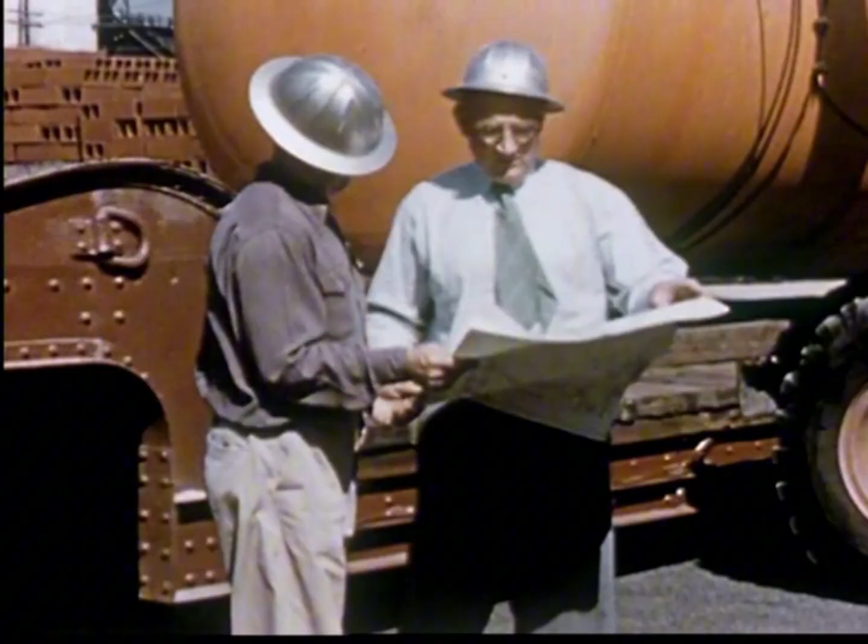In the 1950s, mechanical engineering was at the heart of industrial progress. From designing engines and machines to improving factories and transportation, engineers shaped the technology that defined a new era. It was a time of slide rules, drafting tables, and hands-on problem-solving, long before computers transformed the profession. This rare footage takes us back to the workshops and offices where ideas became machines, and machines powered a growing world. Welcome to Industrial Heritage.

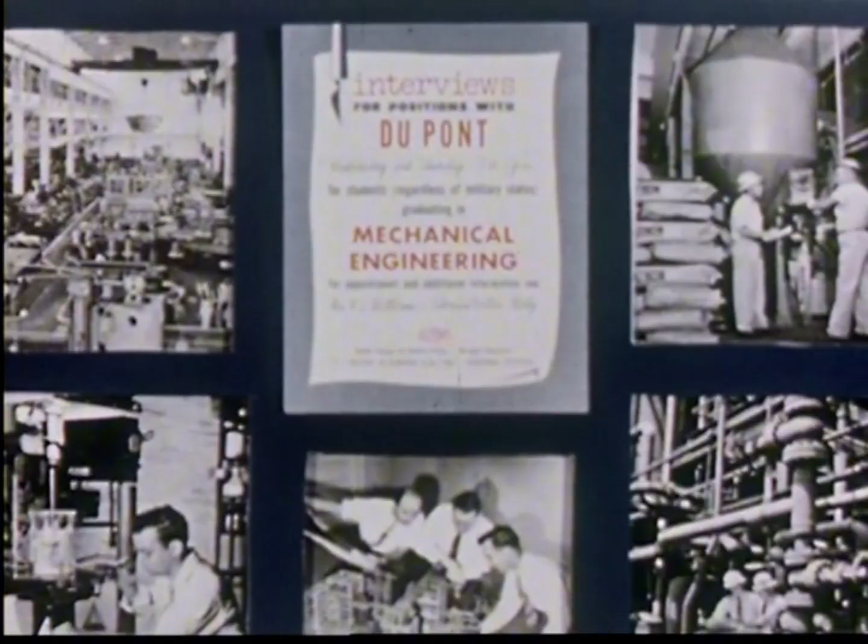This motion picture has been made to help you men who have chosen mechanical engineering as your profession. Perhaps you've considered working for a chemical company. Perhaps, like some mechanical engineers, you've wondered what a chemical company wants with men of your training, whether you'd be working for chemical engineers, or maybe you can't see how a mechanical engineer would get very far in a chemical company.

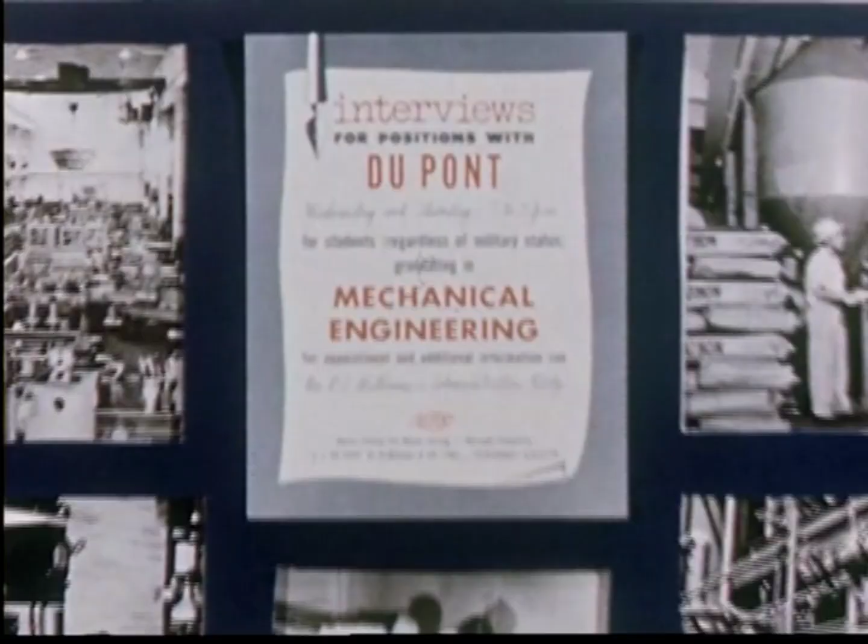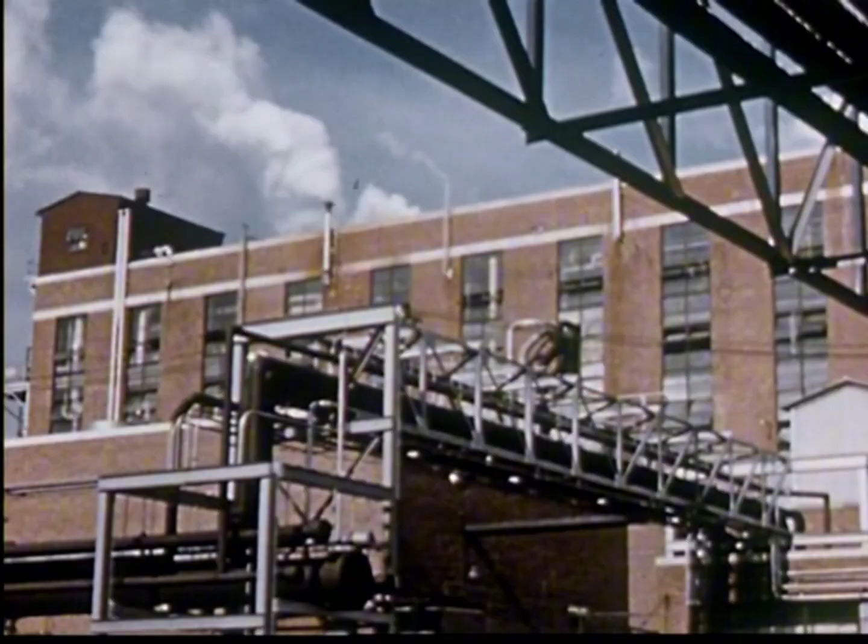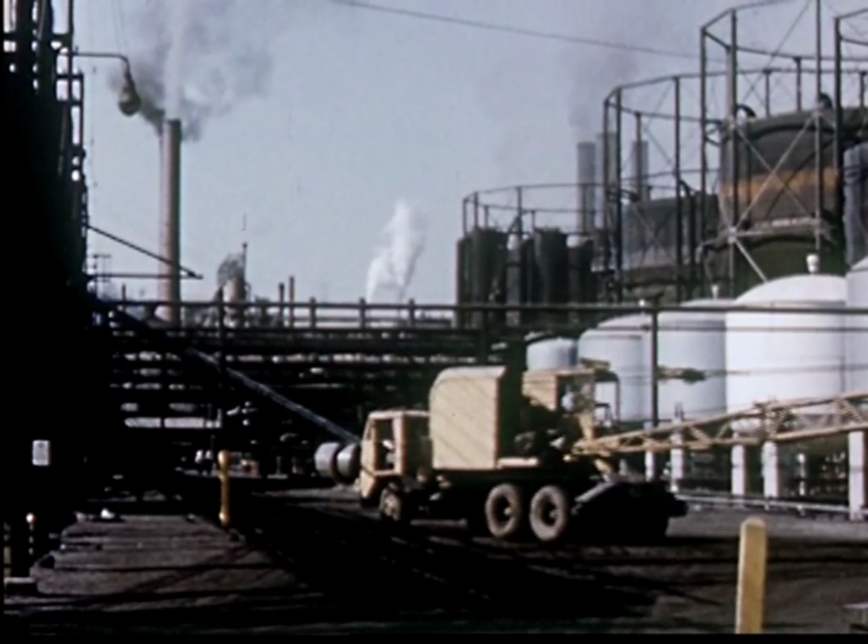That's why we want to show you something of what goes on at DuPont, where your advancement depends more on your interests and ability than on your field of training. Keep in mind throughout this visit to DuPont that the chemical industry is a growing one, growing by leaps and bounds. Just to give you an idea, at DuPont, in the first 5 years after World War II, over $700 million were invested in the manufacturing side of the business. There are now more than 70 plants in 25 states. No one actually can tell where the end is, but we do know that every year new and more complex products come out: new fibers, new finishes, films, dyes, plastics, agricultural products, just a few examples.

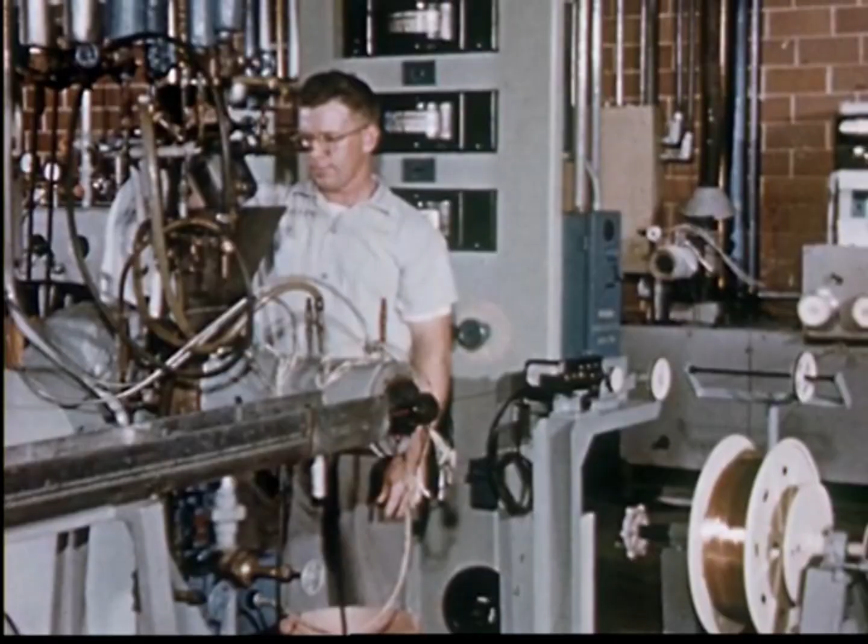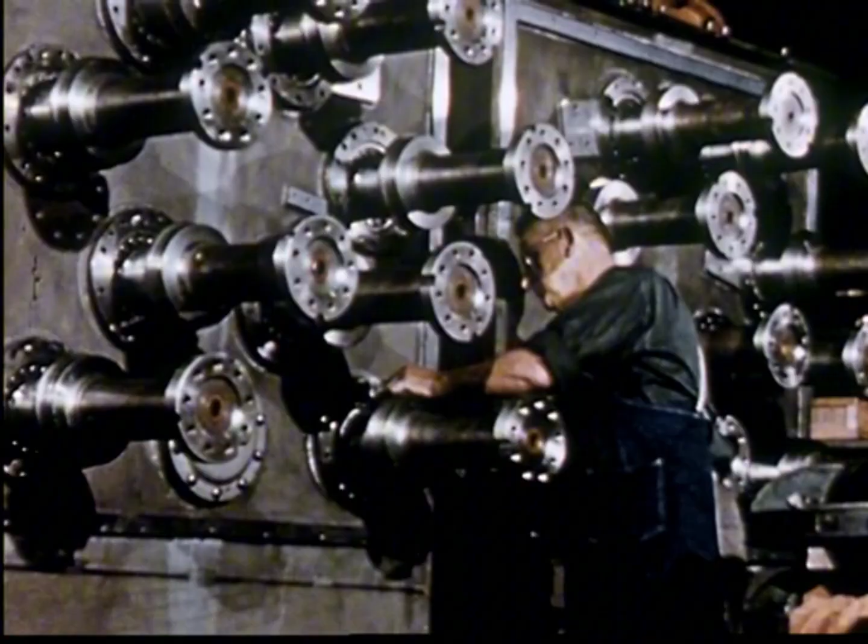Before making any one of those products commercially, a mass of mechanical problems first had to be faced, appraised, and solved. And here's something important to keep in mind: at DuPont, mechanical problems are solved by mechanical engineers. The company does practically all of its own engineering work, right from the very beginnings of fundamental research. It not only develops process equipment, but actually makes a substantial part of it. DuPont men work continuously on ways to improve existing equipment. They design and build the plants, carry on the maintenance, and of course, supervise manufacturing.

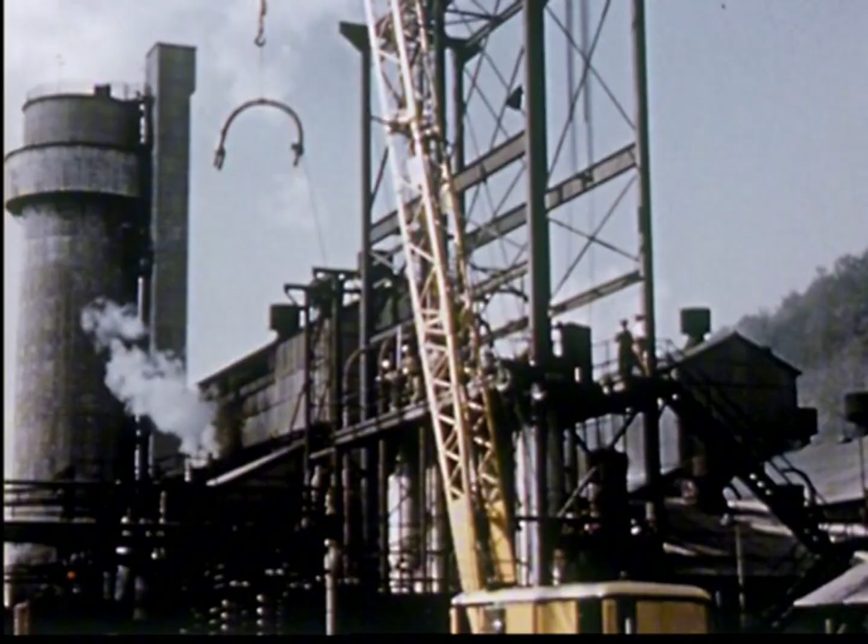Let's consider the opportunities available to you here. Is research and development your special interest? Or machine design? Maybe you're the kind of fellow who goes more for that. How about plant engineering, including power, maintenance, design, and construction? Or production supervision? Perhaps you lean toward this kind of work with its handling of people.

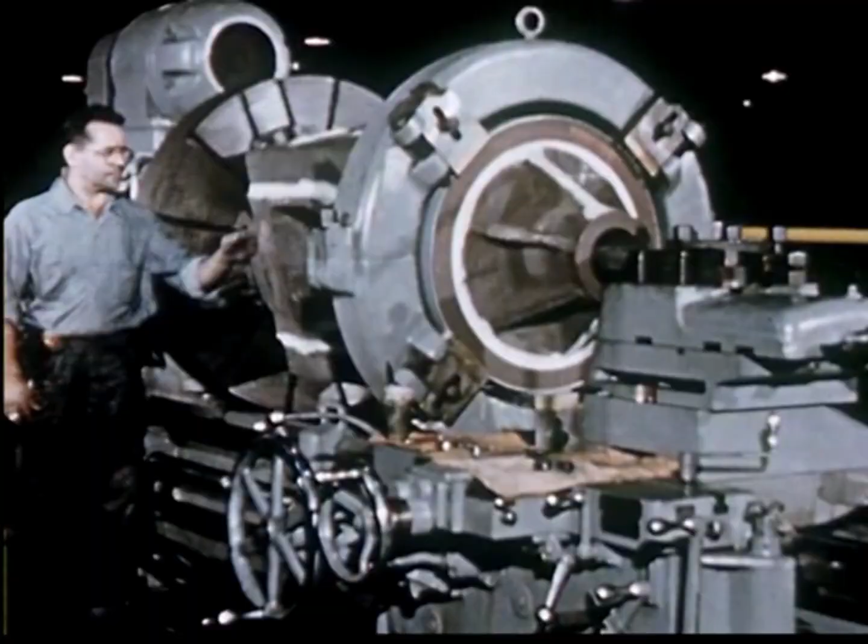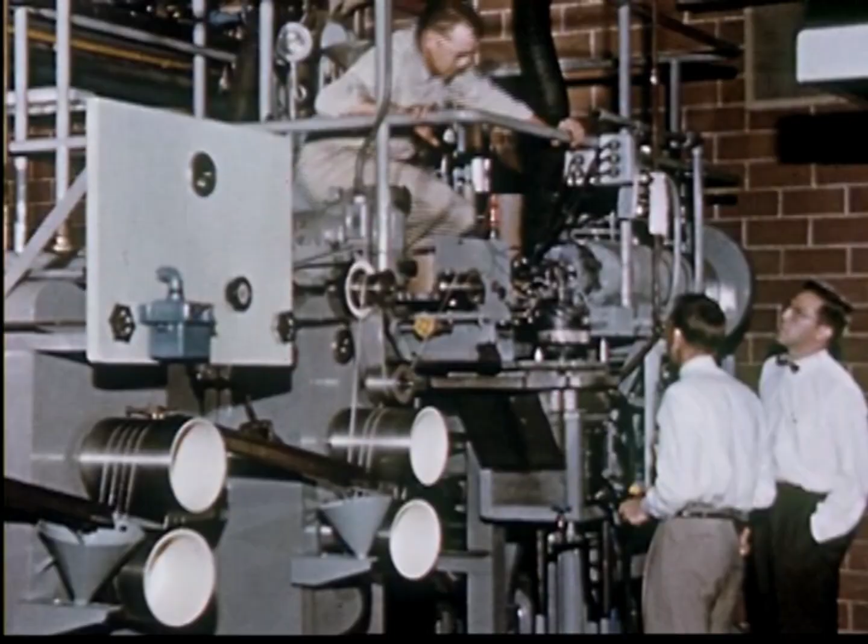Let's start with research and development. Some of the work is done here at the experimental station. A mechanical engineer in this field develops mechanisms used in making the company's products. His work may result in a massive piece of equipment like this, or in a delicate instrument like this one. There's never been a shortage of problems for research and development engineers. They run into the thousands, actually. They may lead to original equipment to meet new and specific needs, or to improvement of machines already in operation.

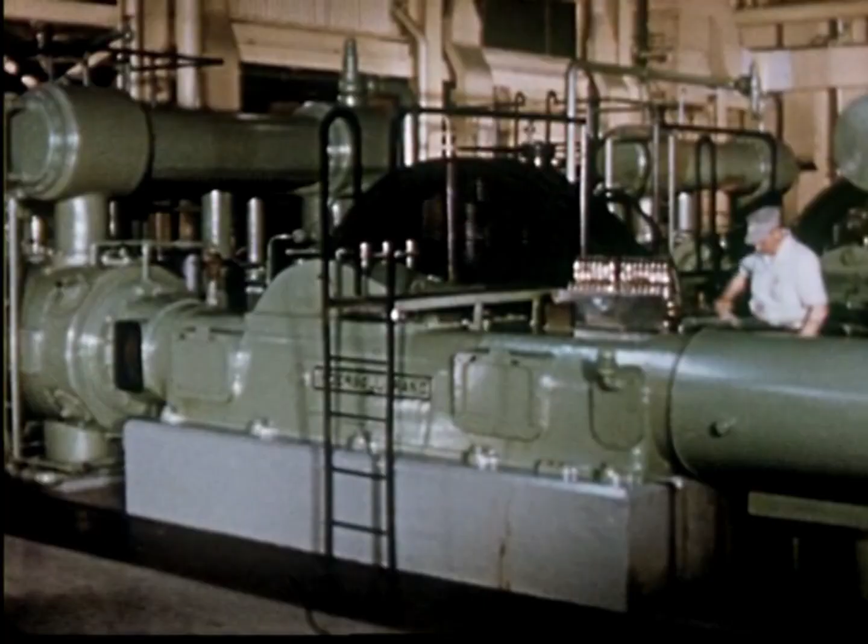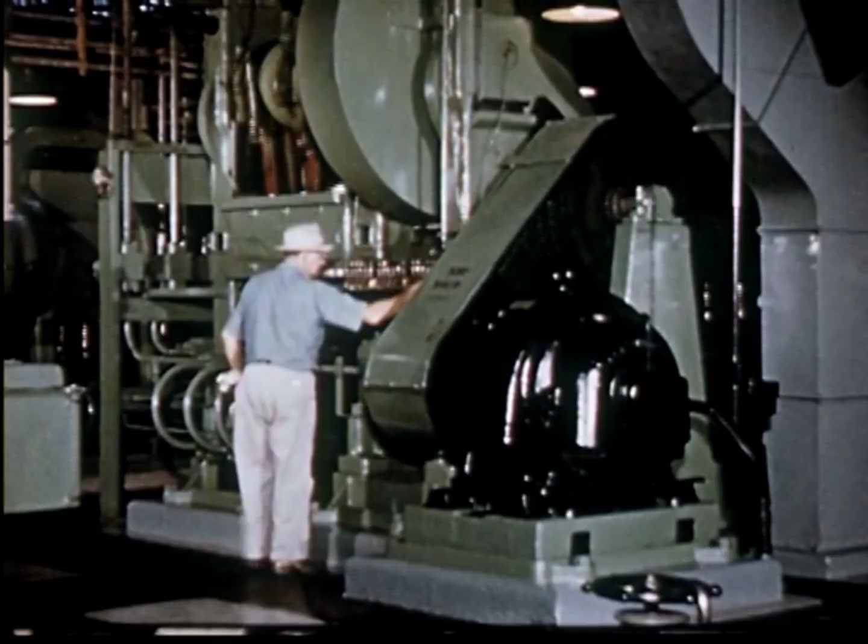Let's look at a few examples. These huge compressors are used in making urea from carbon dioxide and ammonia at high temperatures and pressures. Ammonia pumps like this can deliver about 100 tons a day. At these high pressures, machine work, alignment, and assembly are extremely important. Tolerances are severely narrowed as pressures climb.

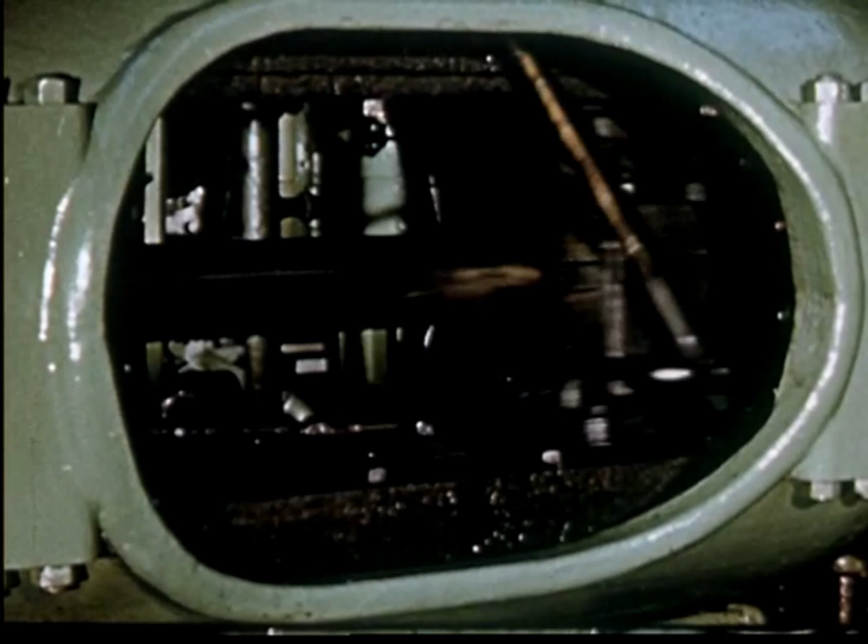One of the secrets of this type of high-pressure work is the action of the pump plunger in the packing. Specification of the right plunger material is essential. High-pressure design calls for great pains to avoid stress concentration, such as might occur in sharp transitions at corners. Pulsations at high pressures cause rapid fatigue of materials and give rise to many design problems that fall strictly in the mechanical engineer's lap.

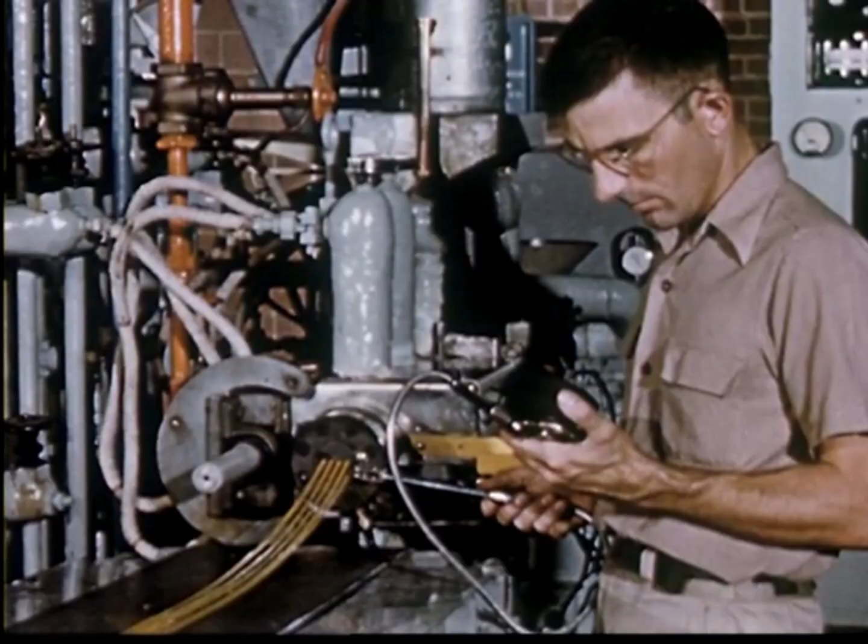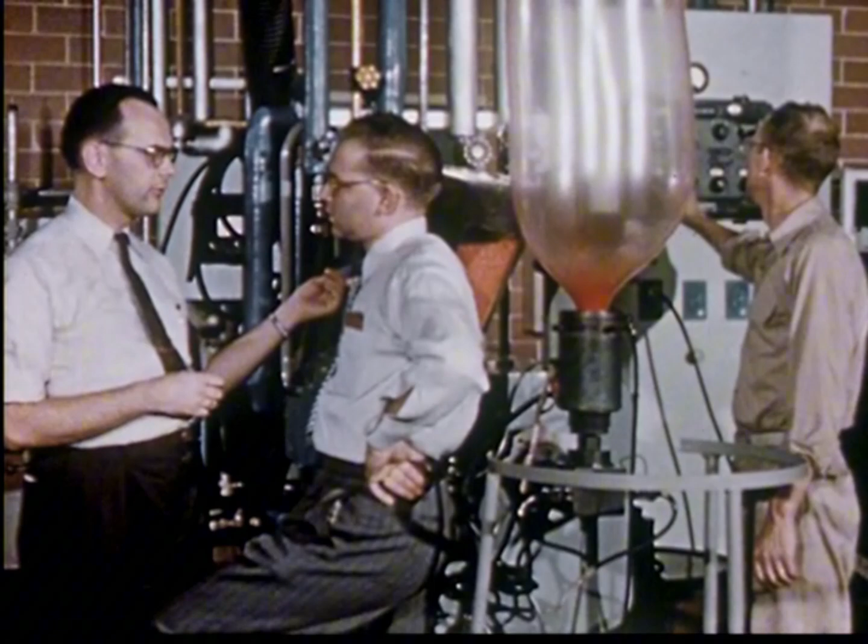Now here's a machine used in the plastics industry. It's called an extractor extruder. It melts plastic, takes the solvent from it, and extrudes it in one operation. To adapt it to DuPont plastics, or to scale it up or down, called for studies in power requirements, heat transfer, and fluid flow. In other cases, engineers often design and develop equipment for use by DuPont customers.

Here are two young engineers working to improve a machine that simultaneously forms and expands a tube of plastic material. Or a fellow may get into a project that requires work at super pressures. Here's a field that's really challenging, and young too. Behind a steel and concrete barricade, equipment can be tested at pressures far beyond those used in manufacturing today.

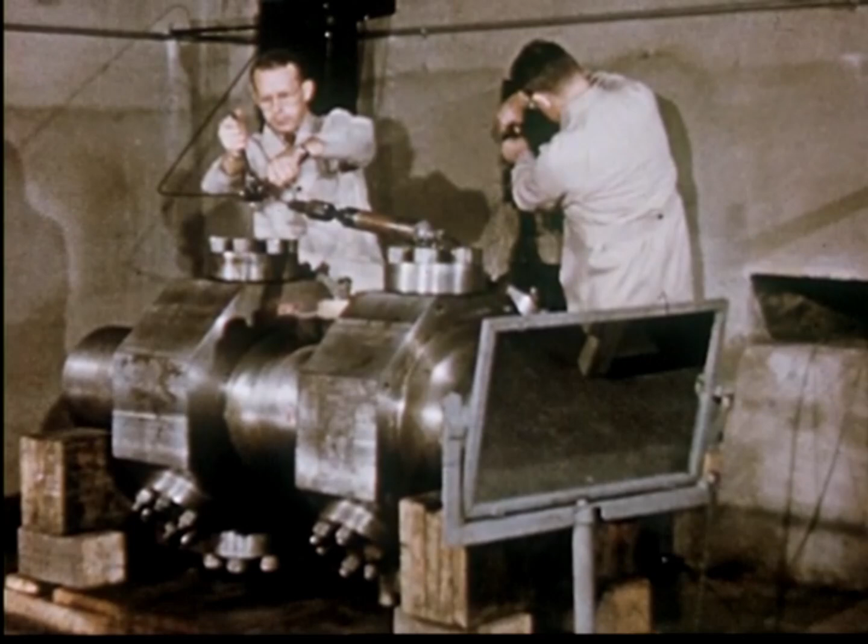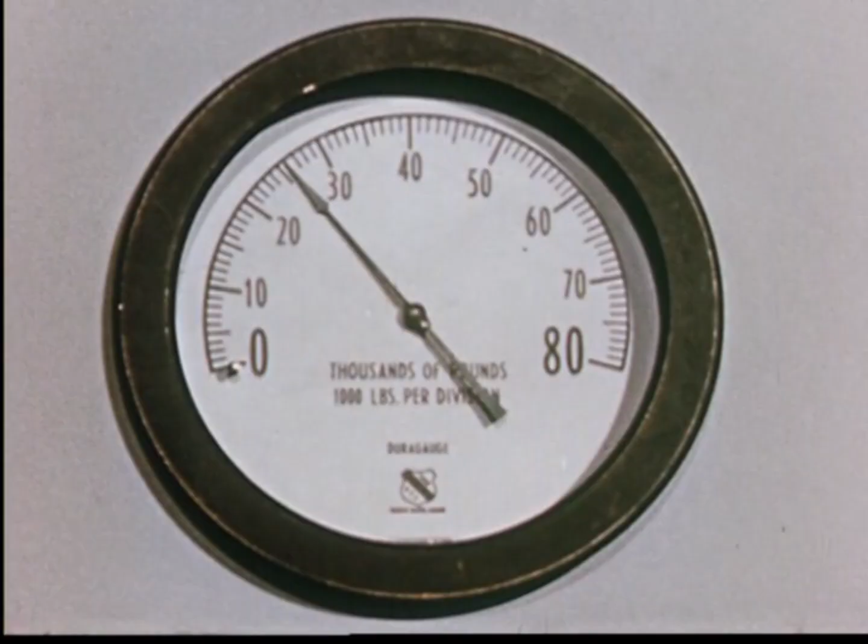After strain gauges have been attached to the test piece and the pressure lines connected, a mirror is placed so that an engineer can observe the results of the test through a periscope on the other side of the barricade. There will come a time when pressures far beyond those of today will be used. 20, 30, 40,000 pounds per square inch. These men are getting ready for the time when pressures even higher than this may become part of industrial practice.

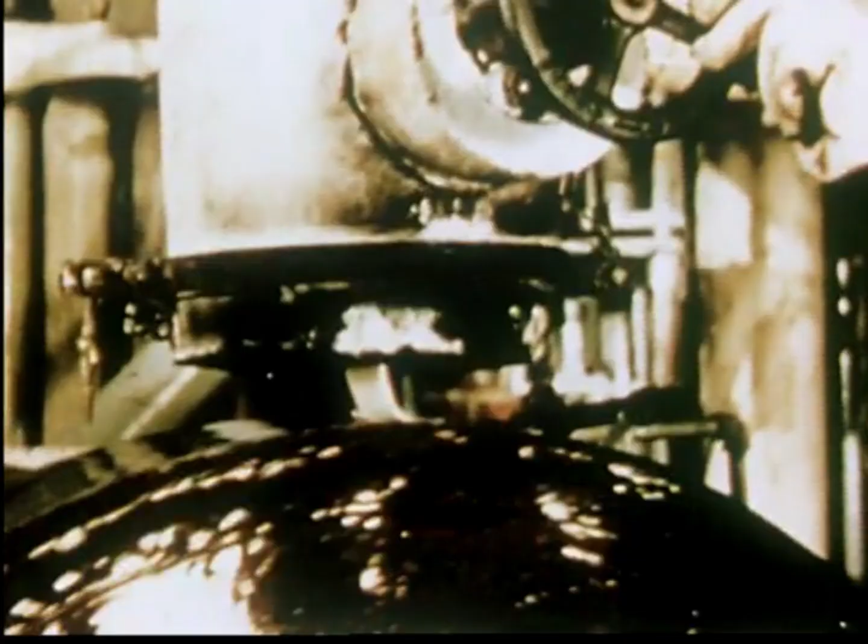When a process or product worked up by chemists moves out of the lab, teams of mechanical and chemical engineers take over. For example, here you see molten nylon being solidified on a semi-works casting wheel at an early stage in the development. Many mechanical problems had to be solved before nylon was produced successfully. And naturally, mechanical engineers had a big part in solving them.

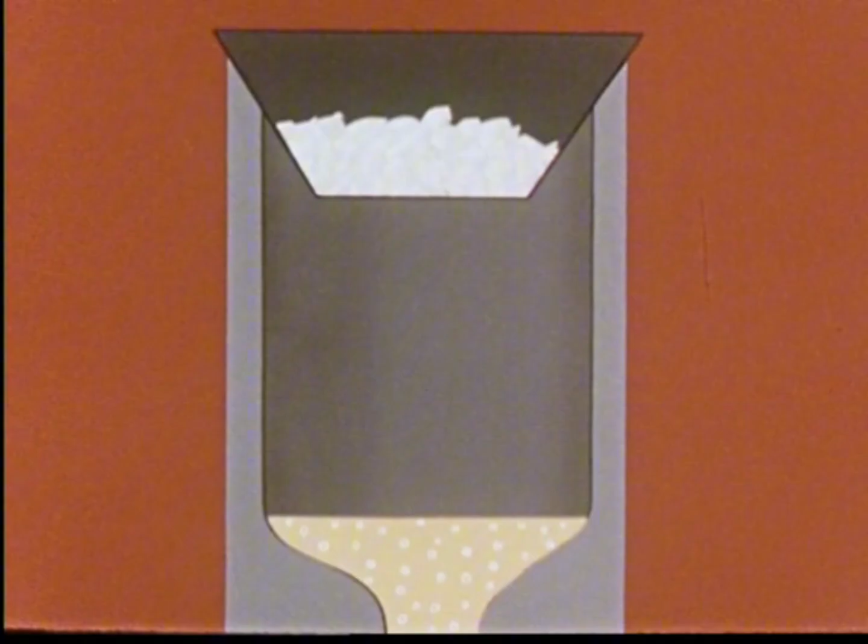Just how would you go about melting nylon chips at several hundred degrees Fahrenheit with as little decomposition as possible? Well, mechanical engineers designed and tried quite a few types of melting grids. Some of them didn't work as well as others, but they finally came up with a grid that did the job.

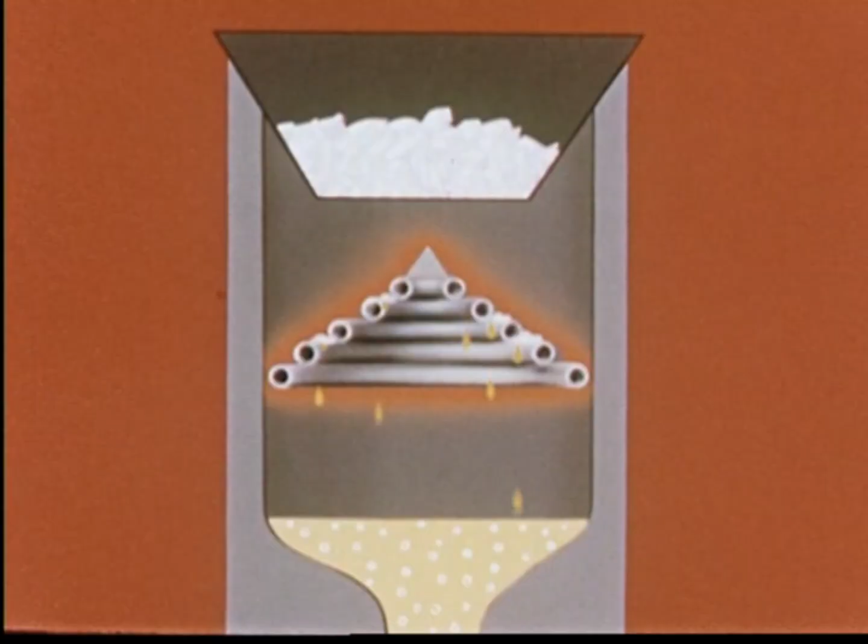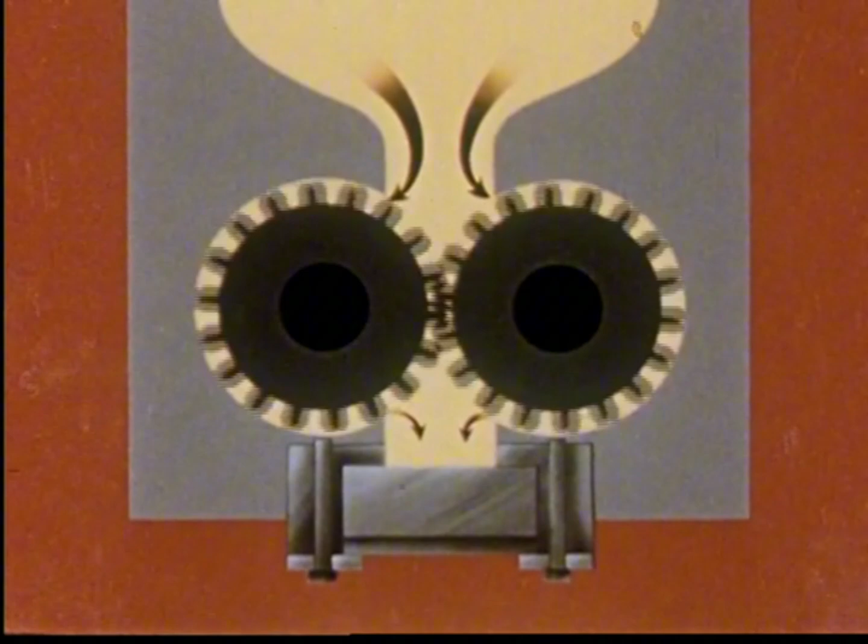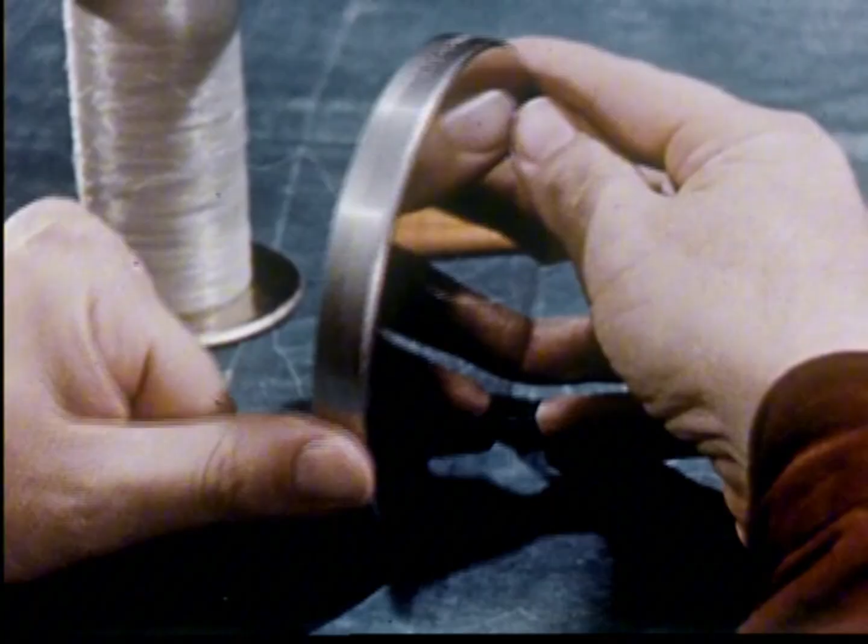And mechanical engineers designed a precision pump that works at pressures better than 1,000 pounds per square inch, but not before they licked the problems of gasketing, sealing, and materials. The hot melted nylon solidifies into filaments as it is pumped through holes in the spinneret that are almost too tiny to see. Naturally, that spinneret isn't a standard item either. It had to be designed.

Nylon fibers are sometimes wound on these spools at a rate of 1,000 yards a minute. How would you go about winding yarn at that speed without any deviation in yarn tension? Sound like an interesting problem? The fellows who developed this traversing mechanism certainly found it so.

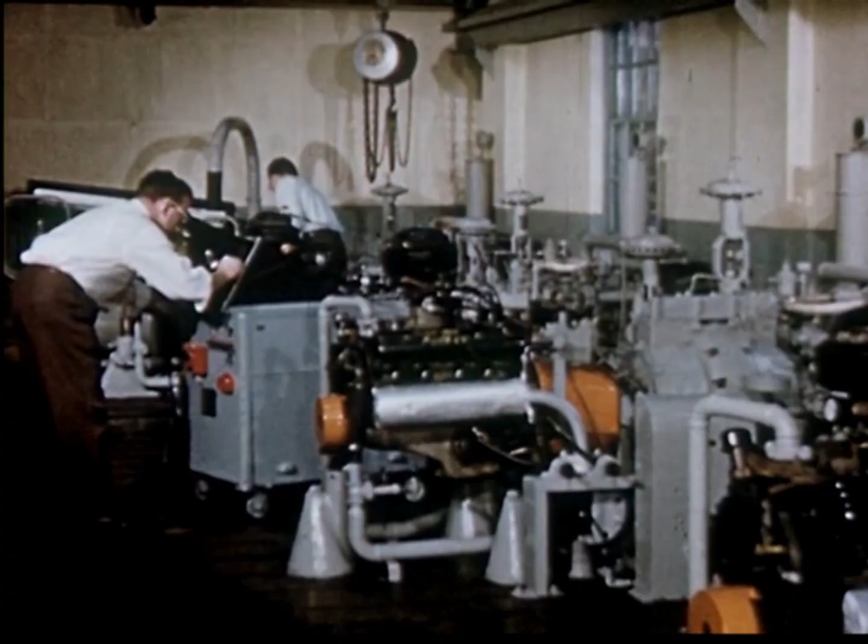Let's move on to this petroleum laboratory to see another important part of development work, activity devoted to improving existing processes and products. Here, engineers are constantly trying to improve the chemicals DuPont sells to the petroleum industry. The road to any kind of improvement is filled with facts, and these engineers are getting the facts by studying the action of lubricant assistants, grease stabilizers, and other petroleum additives.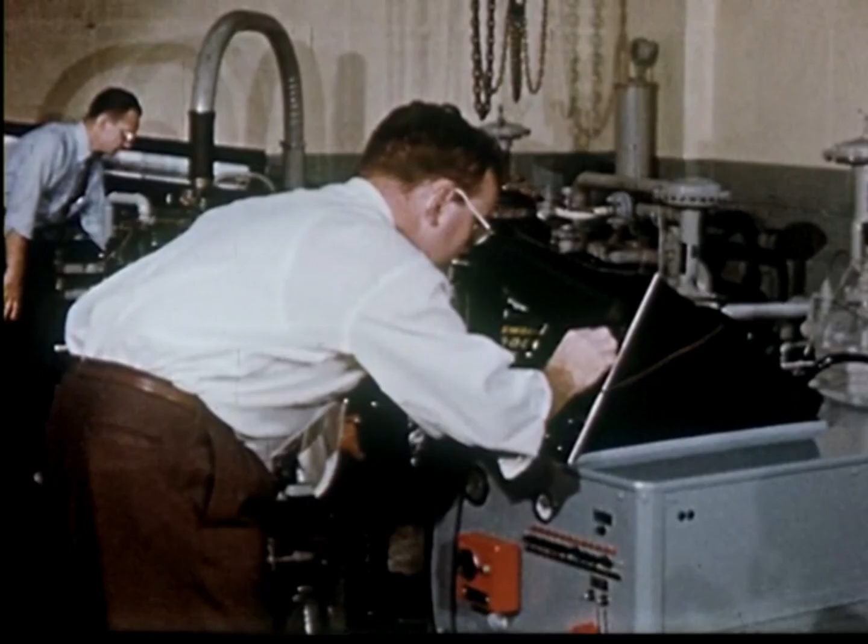Here, engineers are studying exhaust condensates that indicate the effects of tetraethyl lead. Engineers study these things in the laboratory. They study them out on the road, too, in passenger cars, in trucks, through tests under various kinds of rigid control situations. The instruments in this test car indicate and graphically record information on such factors as horsepower, fuel consumption, speed, spark setting.

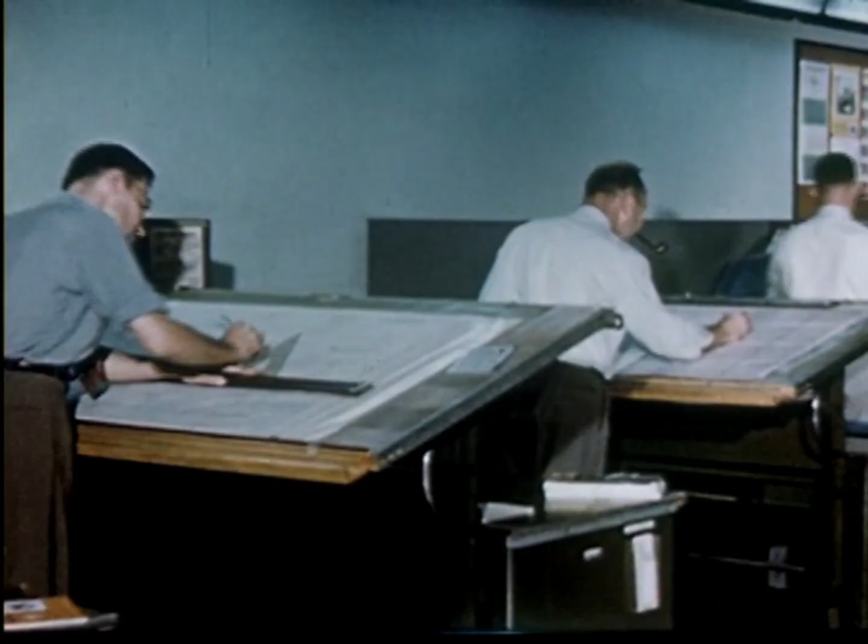That's the way mechanical engineers, working with chemists, arrive at conclusions which result in better and better engine performances. We have seen that research and development includes developing new process equipment and improving existing processes. It also includes design. The engineering department handles design work for most major projects. In some cases, it is machine design. In others, process equipment design. But always, it is the work of teams of engineers, mechanical, chemical, electrical, civil, and so on.

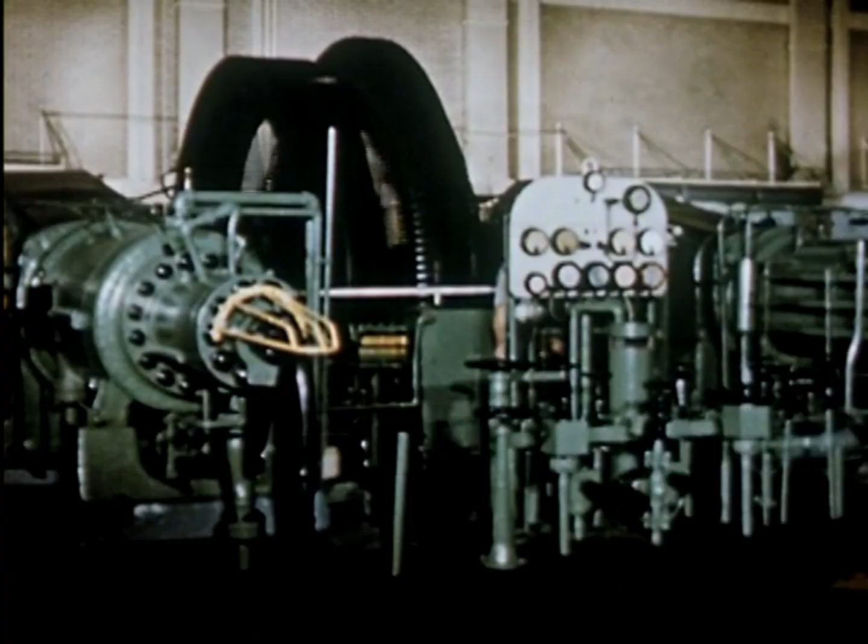Normally, these are men who make their careers in engineering. They work with engineers from the manufacturing departments to design plant equipment and machines. For an example of major design, how about this huge hypercompressor? It builds gas pressures from 450 pounds to 12,000 pounds in 3 stages.

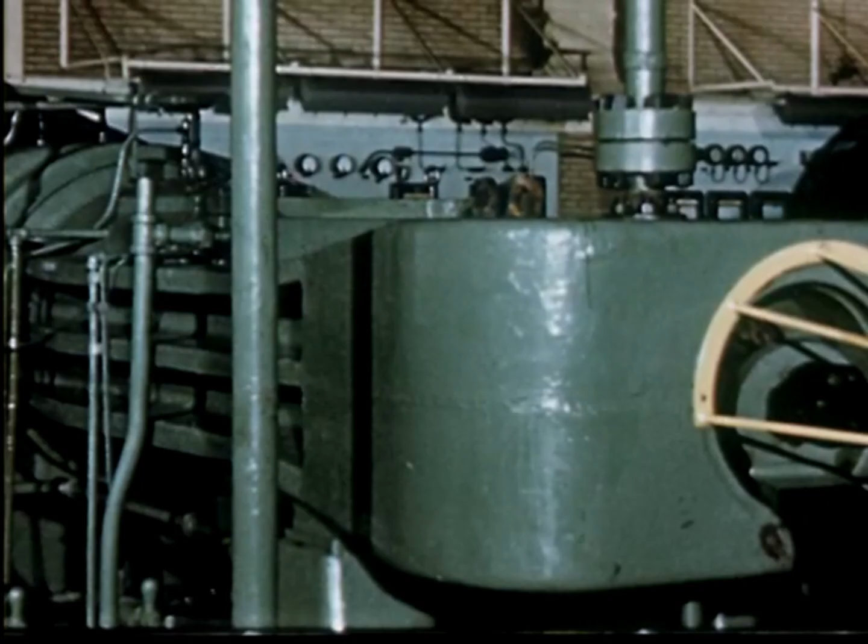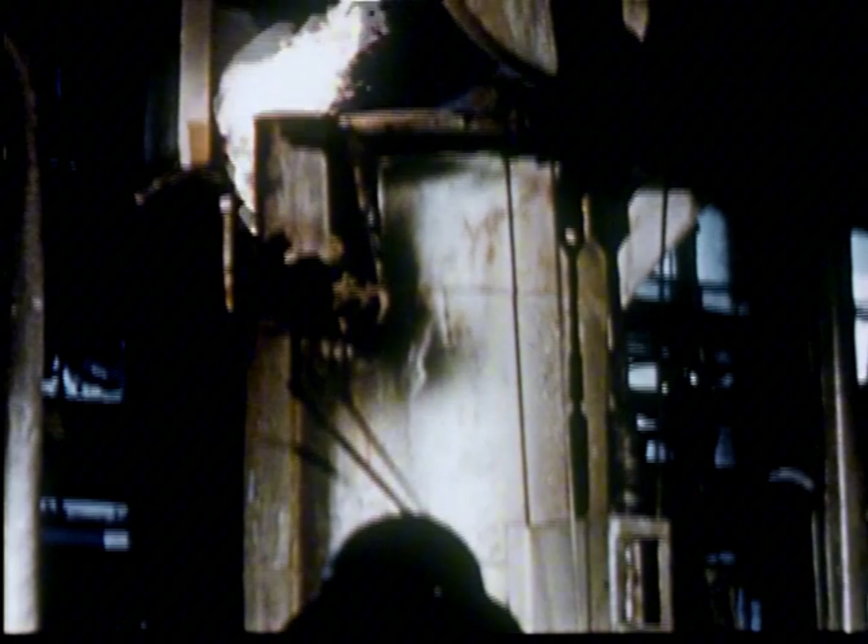When these compressors were built, you just couldn't buy equipment like it. So DuPont engineers pitched in and designed their own. Or maybe you'd like to roll up your shirt sleeves on one like this. Adapt standard equipment, such as this flue gas generator and its control mechanism, to DuPont's ever-changing needs. Over the years, more than one mechanical engineer has thought hard on this one. There she goes.

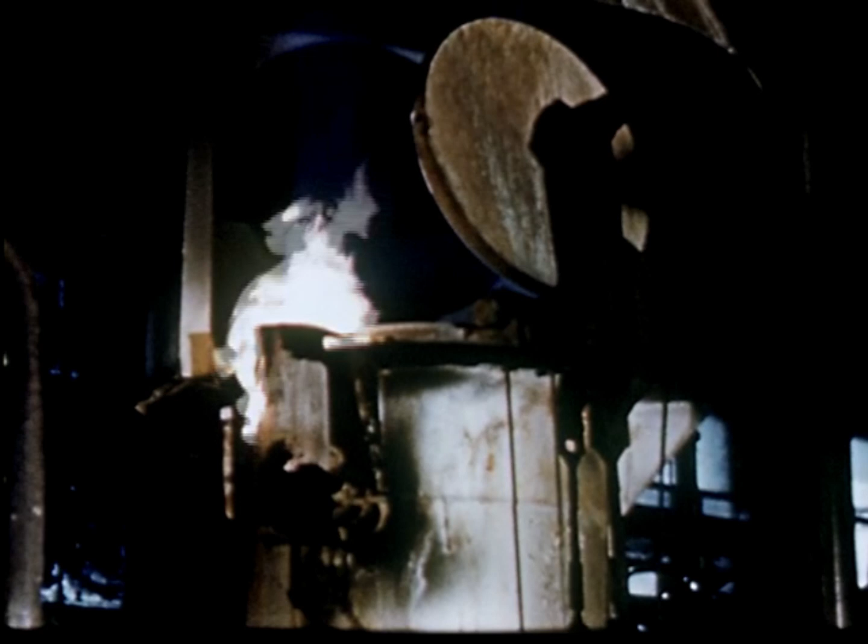These are just a few of the problems mechanical engineers work with at DuPont. They are typical of the work in research and development. Multiply them by 100. No, better make that 1,000. And you begin to get an idea of how important mechanical engineering is in this chemical company.

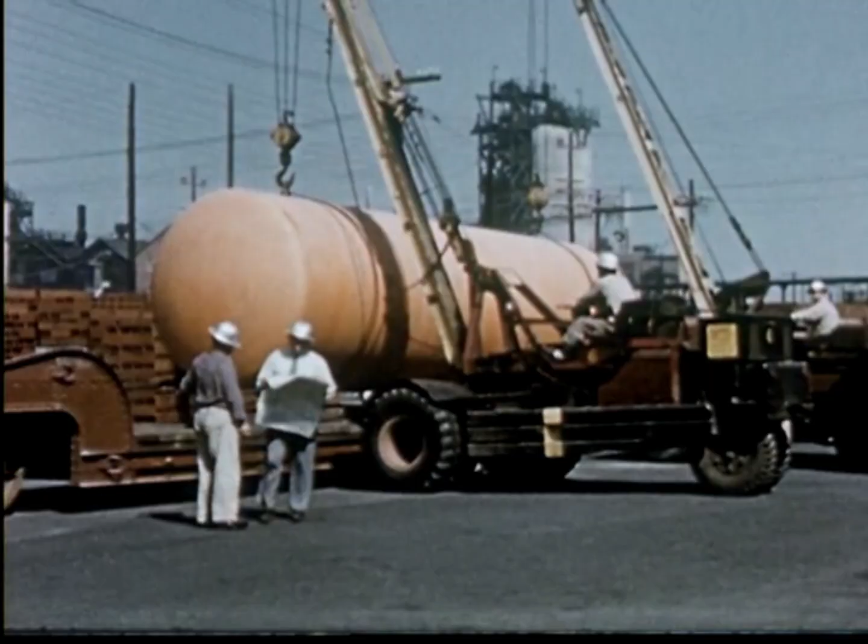Another important phase of mechanical engineering is plant design, layout, and construction. Most companies use outside architects and contractors for this work, but DuPont does all its own. Often the engineers who supervise the construction of the plants also stay on to help get them going. Of course, the design of services to go along with the buildings and machinery is included in their activities.

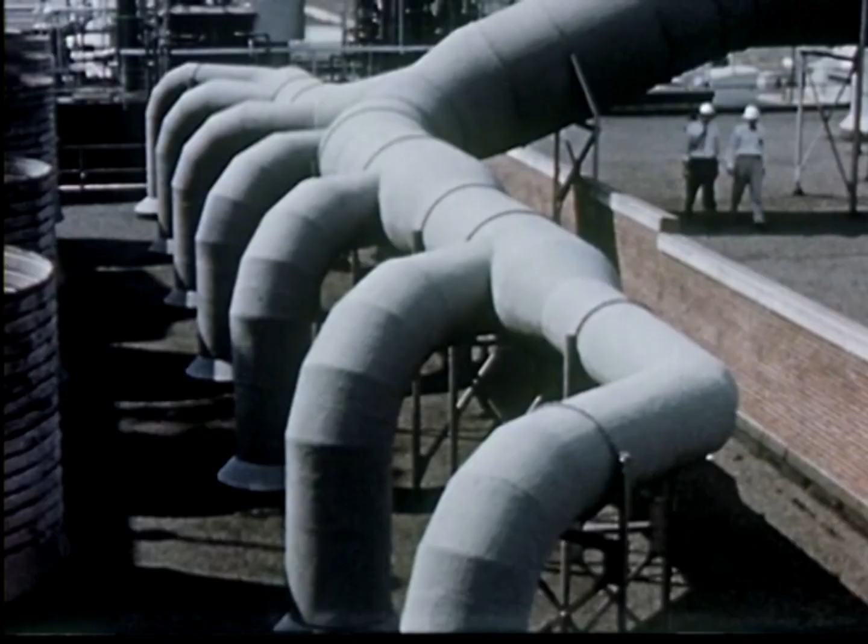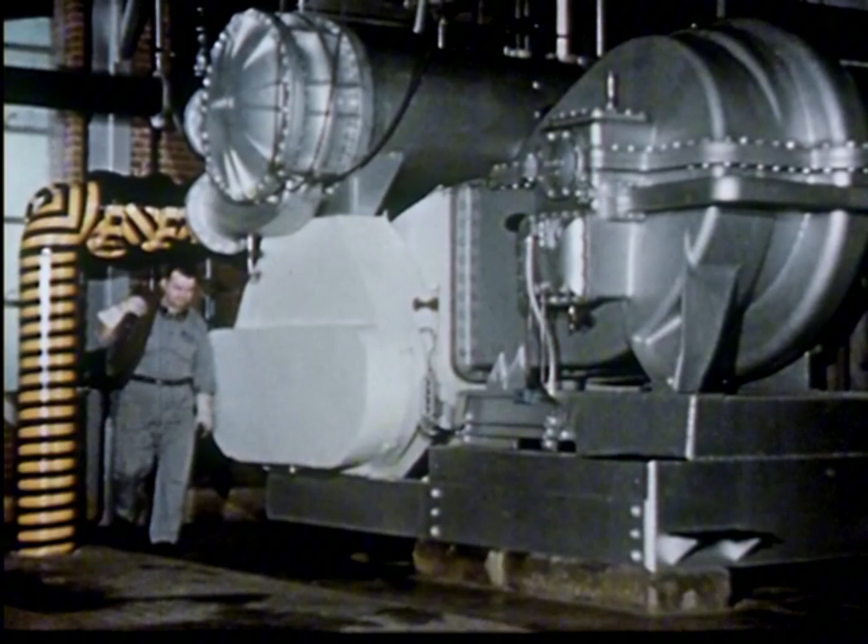For instance, this nylon manufacturing plant. These ducts are part of an air conditioning system DuPont mechanical engineers help design. During the manufacturing process, air is required at 5 separate temperatures and humidities. That's right, 5. That sort of a problem interest you? As you can imagine from the size of this compressor, air conditioning is a pretty important item in many of

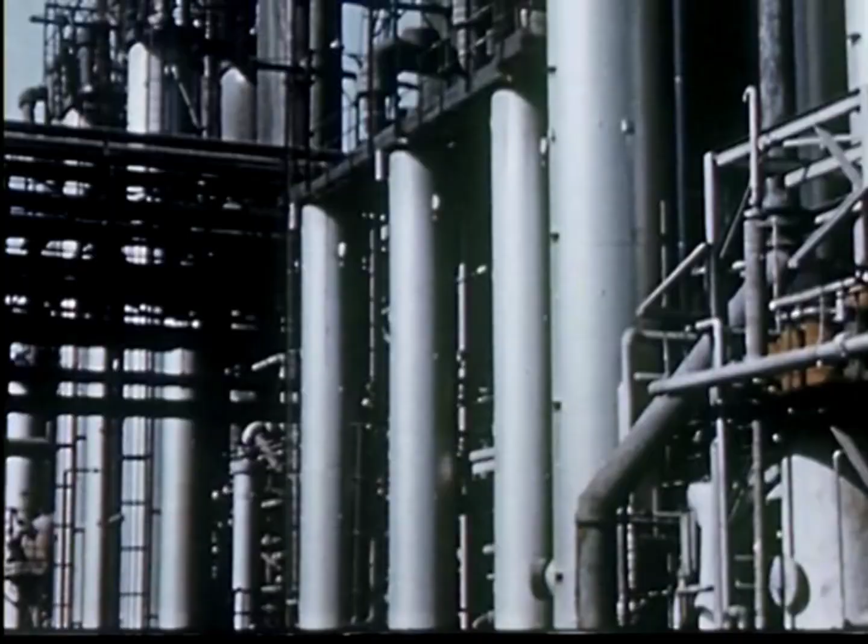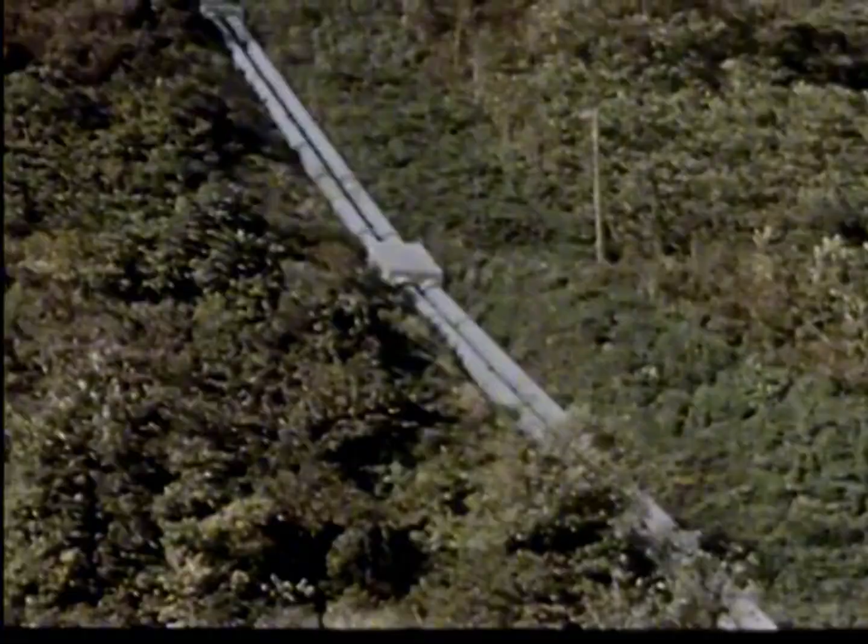DuPont's 70-odd plants. Or say you were tackling this problem, scrubbing carbon dioxide out of a gas mixture. These towering scrubbers work at about 400 pounds. The pressure at the scrubbers forces the solution up the side of a mountain. Here in this tower, the pressure is released and the carbon dioxide passes off to the air. The natural fall of the water gives 200 pounds of head, which doesn't have to be supplied when the water is recycled. That's both equipment and plant design in a big way.

Speaking of design, how about control instruments? That sort of work interest you? They are very important in plant design, and the advances in this field have been tremendous. Matter of fact, control instruments today are practically a must for nearly every phase of manufacturing operation, because they've come to mean so much in terms of safety and economy.

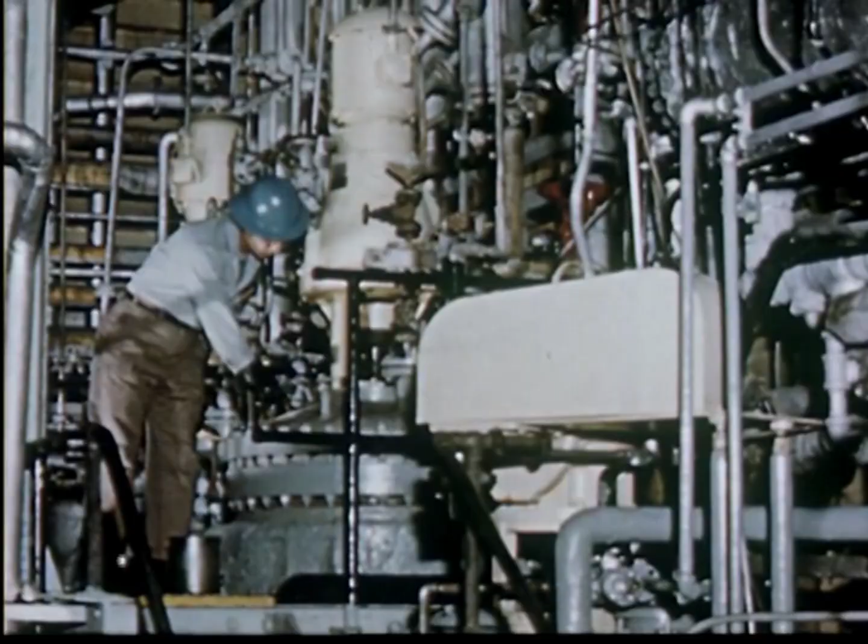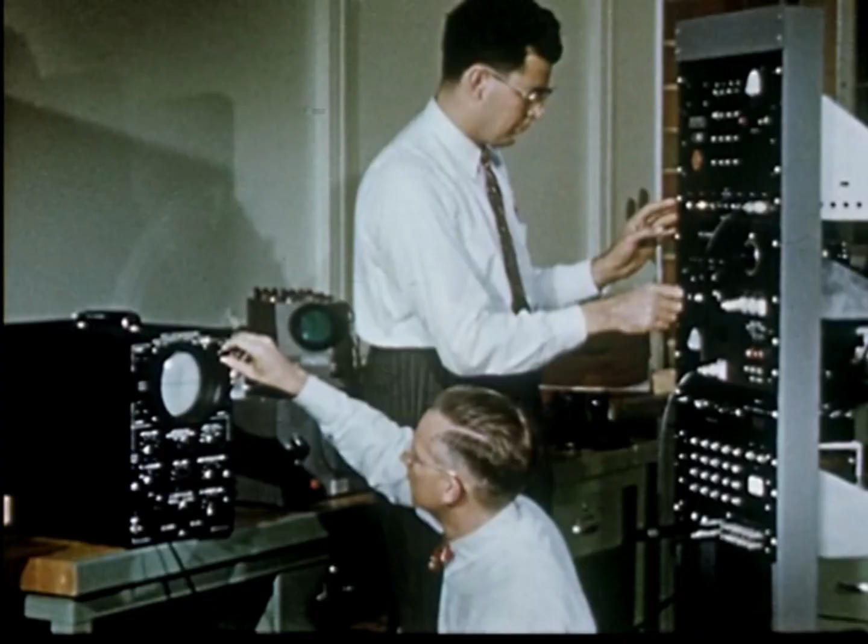Take a look at this maze of pipes, for example. To get maximum production yields, reacting chemicals must be brought together under conditions as nearly ideal as possible. All steps in the process must be smoothly coordinated. Actually, some processes of today couldn't operate with instruments of 10 years ago. It's a fast-moving, intensely interesting field. If this kind of work appeals to you, whether you tackle it from the plant design end or from the development end, instrumentation offers tremendous opportunities.

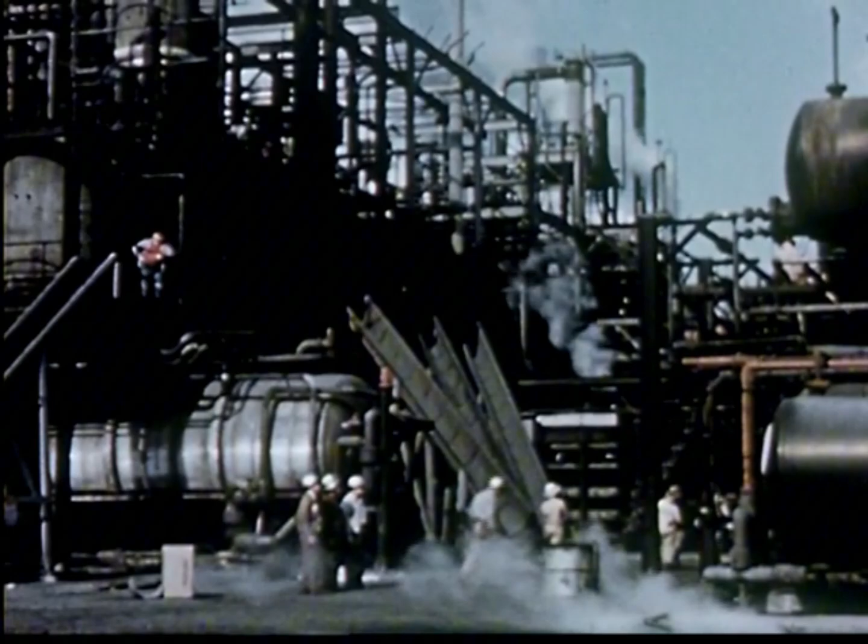Still another field for mechanical engineers at DuPont is plant engineering. This is a fairly broad field, including maintenance and power. It also includes design and construction on sub-major projects that may involve process improvement or plant expansion. Nearly all chemical manufacturing operations must run on mechanical equipment: tanks, kettles, presses, pumps, valves.

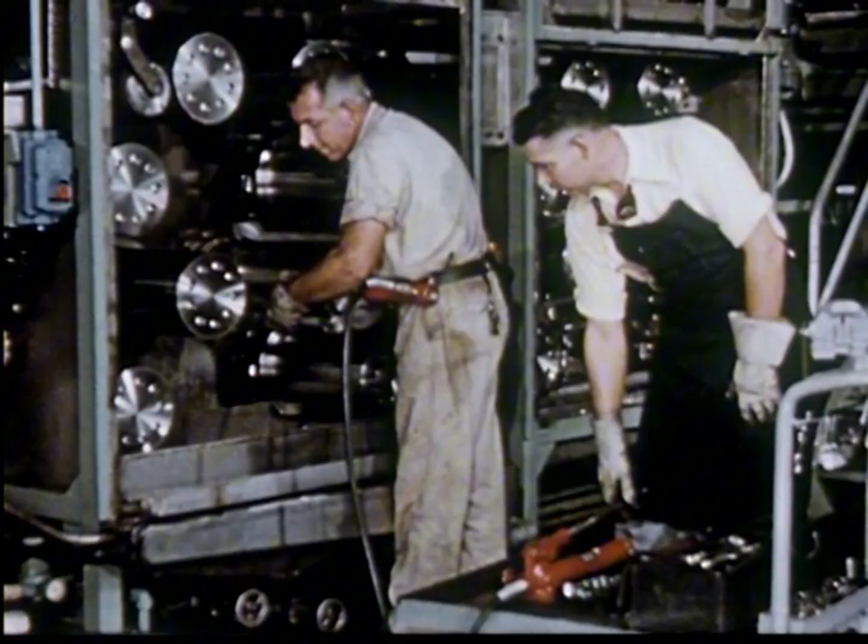And this equipment gets heavy use, much of it on a 7-days-a-week basis. It's bound to wear out, and that means maintenance. Part of maintenance is keeping equipment in top mechanical shape, catching trouble before it catches you. Supervising this work calls for real ingenuity, and it involves real engineering ability.

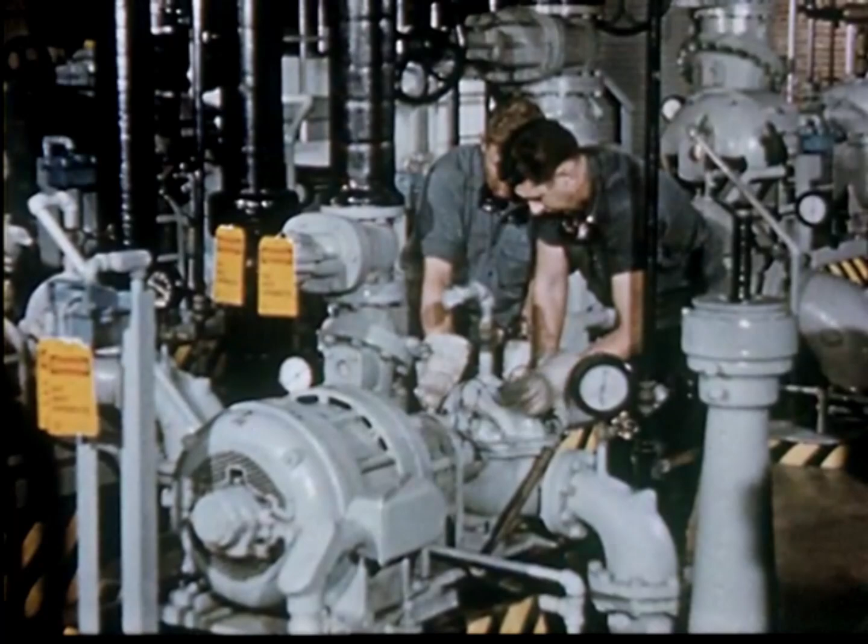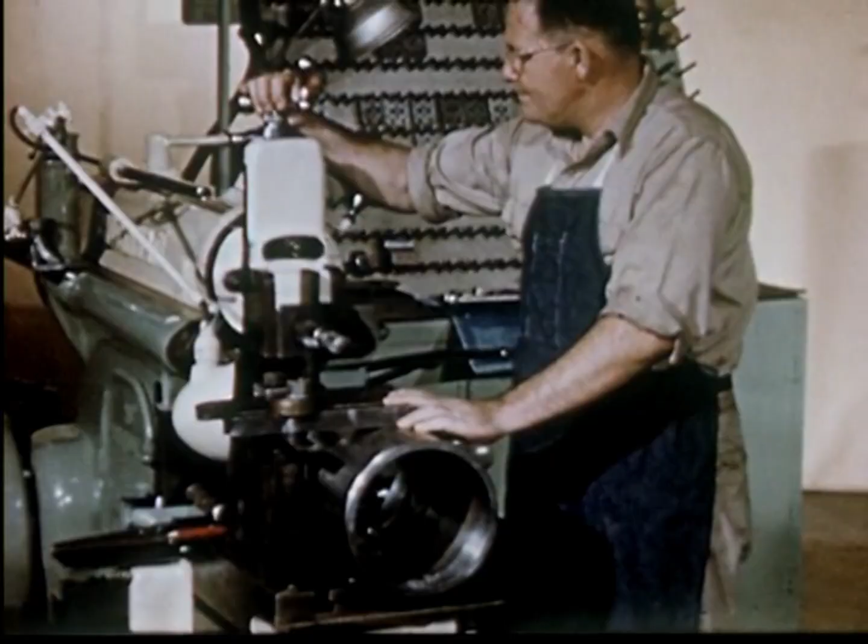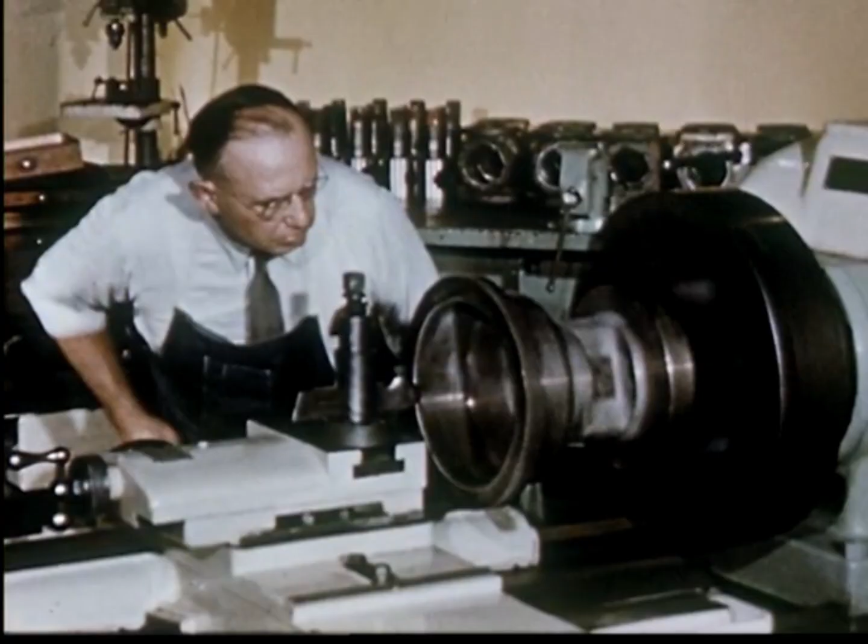Then there's the maintenance of pumps, gearboxes, automatic lubricators, and a great variety of complex equipment and process machinery. Here again is a supervisory job for alert engineers. Helping with the maintenance work are the machine shops at many DuPont plants. The needs of some of these shops are always changing. That means an almost continuous program of mechanical study ranging from layout and scheduling to working up shop standards.

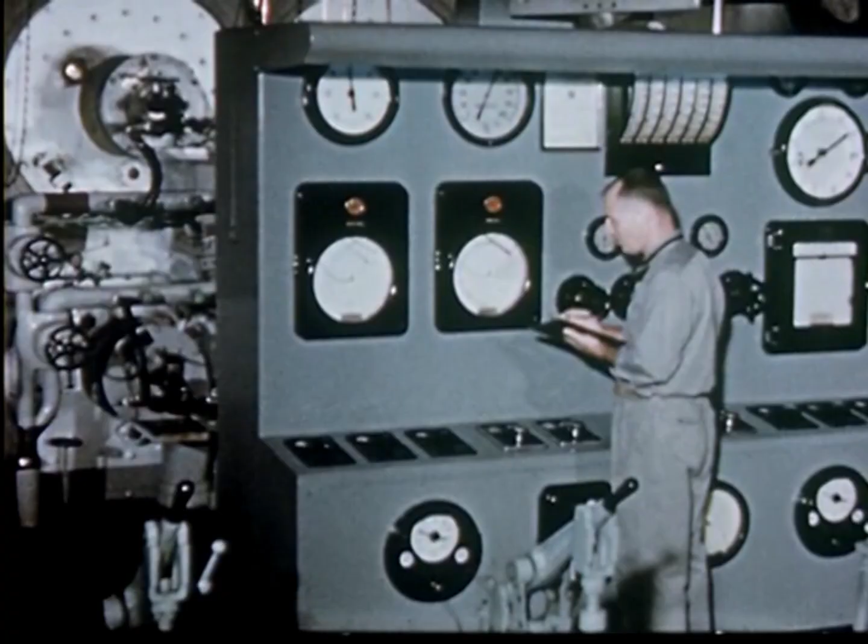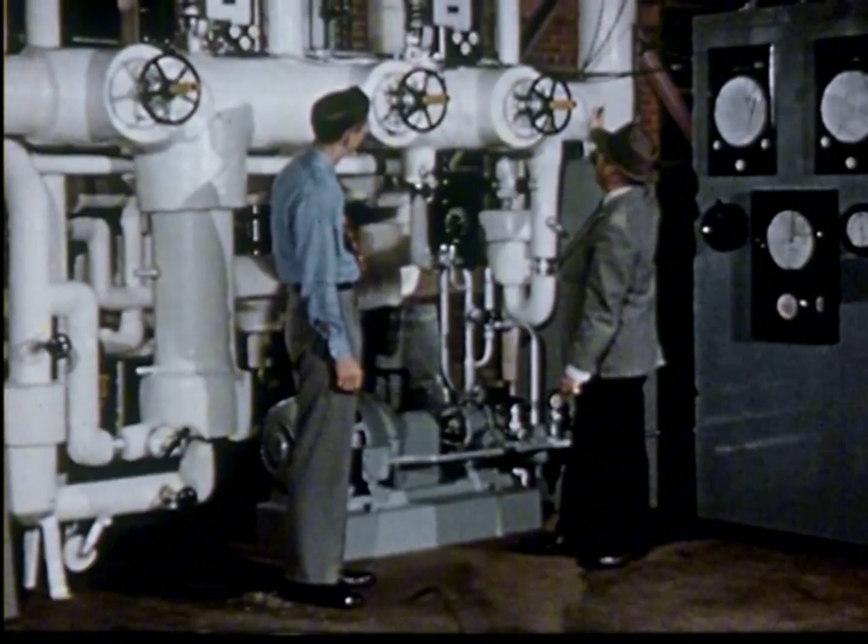Now, let's say your major interest is power. Power is as essential in a chemical plant as it is in any other kind. And the power problems that arise from some of DuPont's complex operations are about as challenging as can be found anywhere. Power engineers at DuPont must supply steam, electricity, water, air, refrigeration, and other services under a variety of conditions.

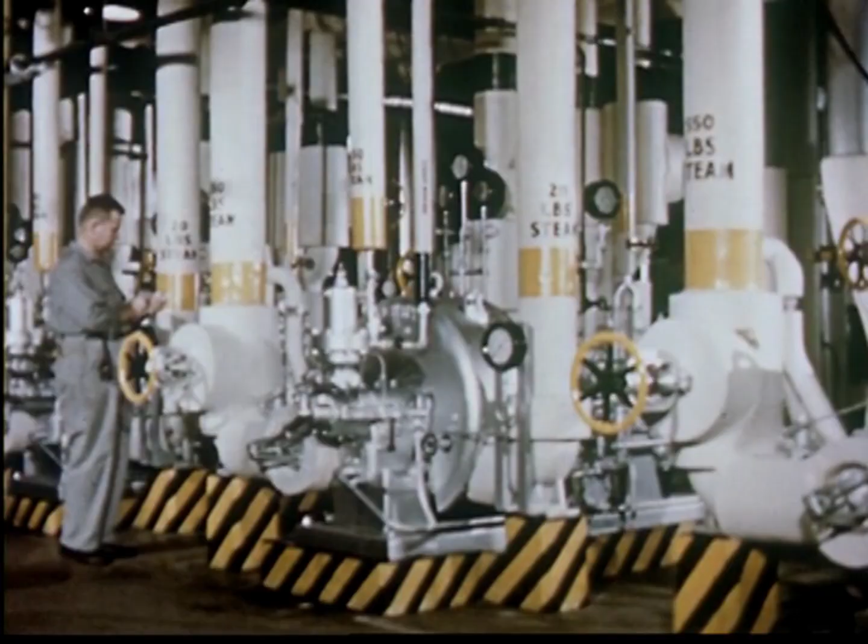Look at this steam reducing station. It is one of several operating at various pressure differentials. They supply steam at the right pressures and temperatures over a wide range of capacities, from 1,000 to 20,000 pounds per hour in short periods of time. Boiler feed water pumps, compression distilling units, fuel pumps. Almost all power plant equipment needs plenty of engineering know-how to avoid interruption in these essential services.

Production supervision is another major activity at DuPont for engineers who like to work with people but still want to put their technical training to good use. The duties are broad and cover all phases of plant operation. Such a job might well include setting up efficient maintenance schedules for equipment, keeping production rolling, maintaining quality, reducing waste, and at the same time, building employee morale.

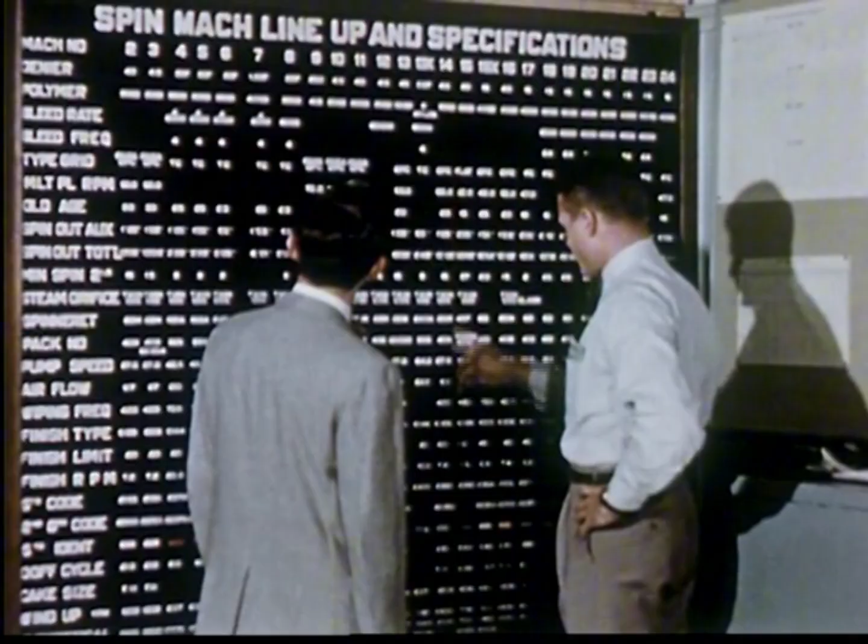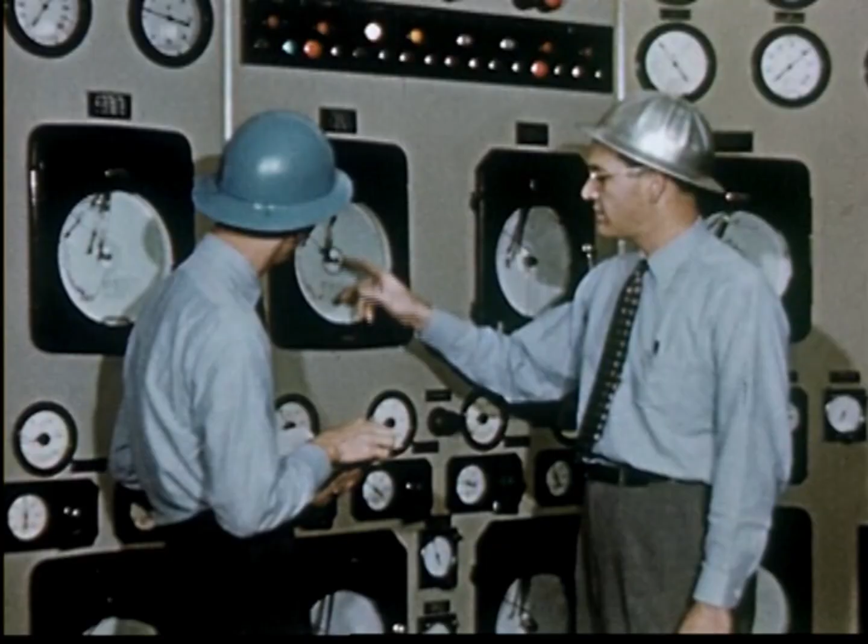Quality production is determined by individual workers. Each must understand the importance of his job, and it's up to the production supervisors to develop this understanding. The mechanical engineers and others who advance in this work train both wage roll and professional employees in manufacturing processes and the use of equipment, an important responsibility.

They also work with development engineers in plant technical sections and the central engineering department. Here their knowledge of the manufacturing process is used in working out designs for process improvement or new plants. In all cases, the planning and conduct of a continuing program of training in safe working practices is an important part of supervisory work. Raw material scheduling, quality standards of intermediates and finished products, handling employee suggestions, all are part of the work in production supervision.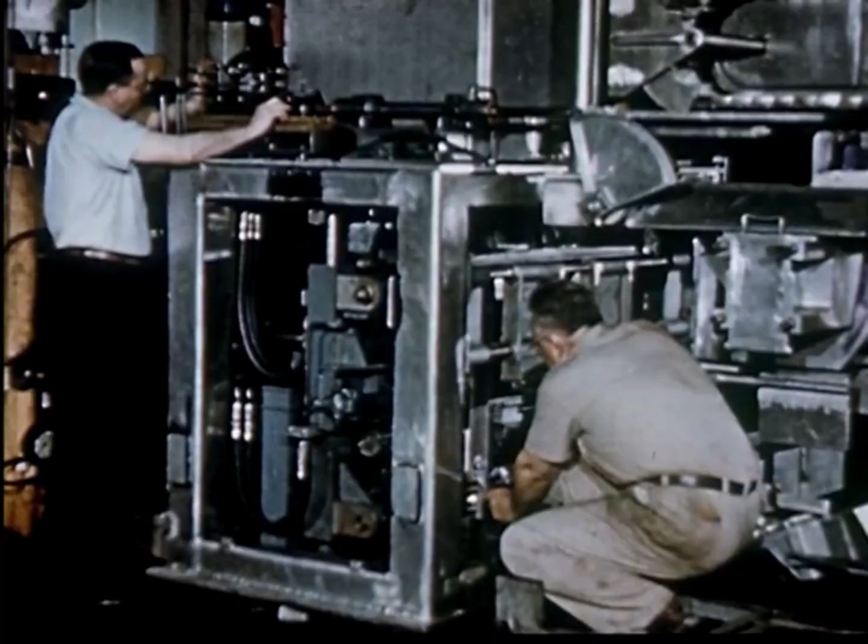The Mechanical Development Laboratory is evidence, too, of how important mechanical engineering is at DuPont. A principal activity of the laboratory is to develop and build full-scale automatic machines to be used as models for those in manufacture. The Wilmington shops are still further evidence.

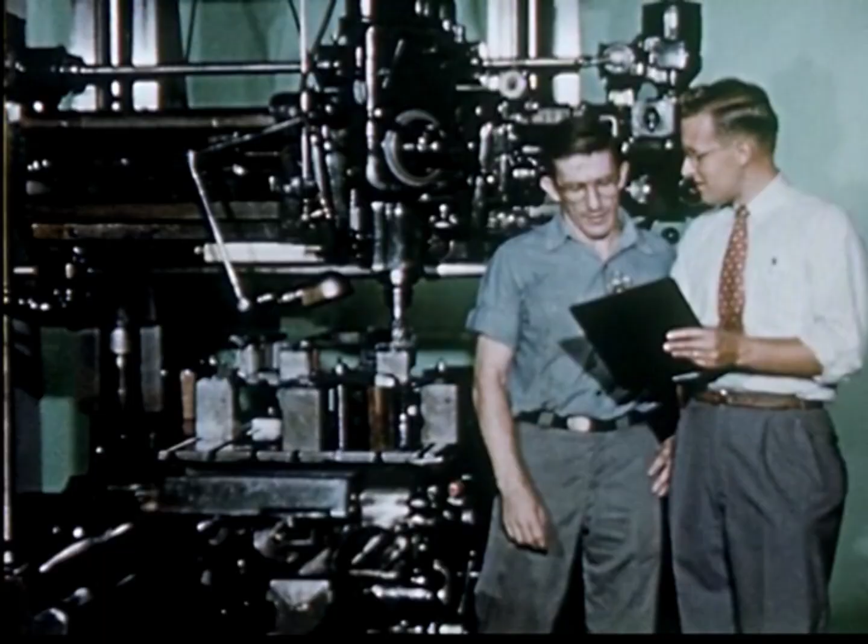They make special equipment and machines for company use. They are among the most completely equipped in the country, and it's all top-notch equipment, ranging from small bench lathes to large diameter boring machines.

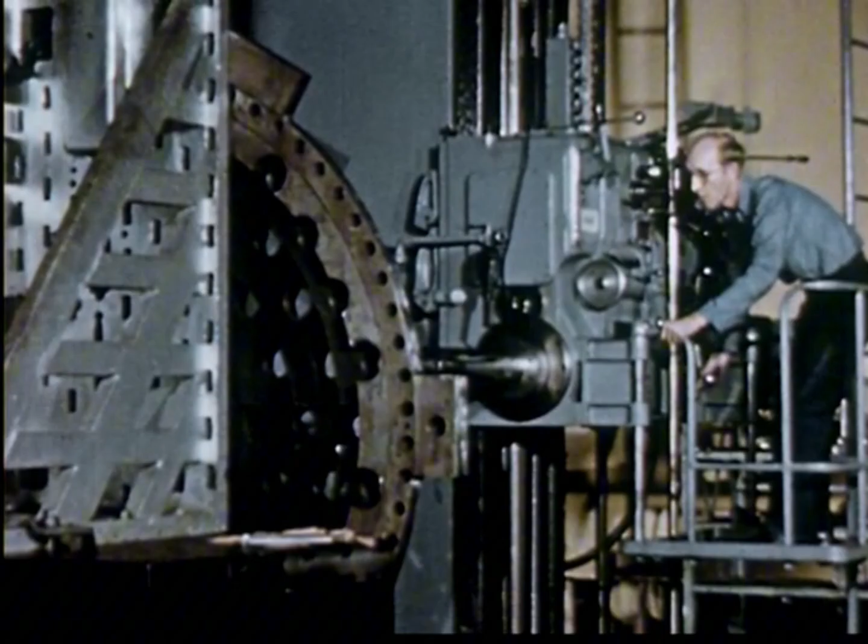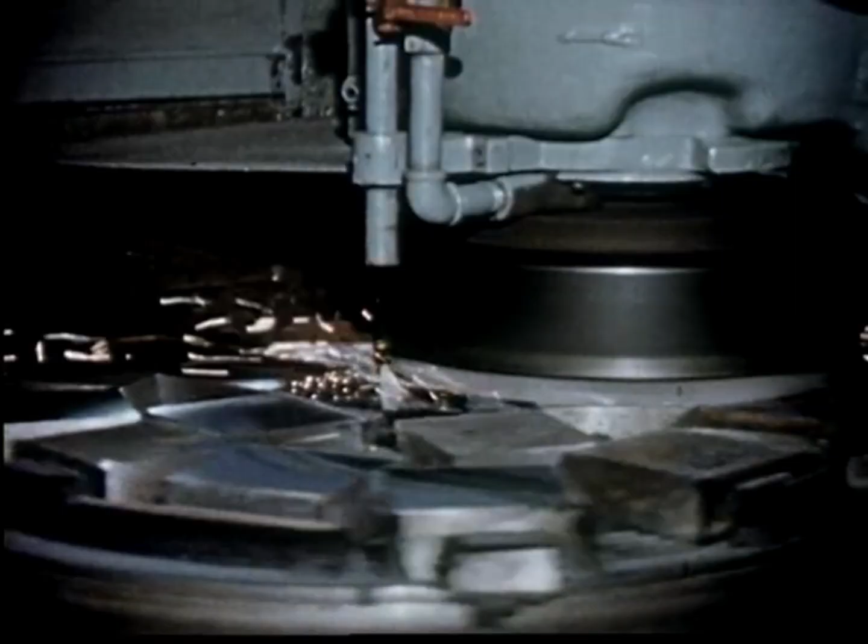Notice that this radial drill press has built-in pits for deep drilling. And how often do you see a 50-inch magnetic chuck? Makes possible the grinding of filter press plates and frames.

Here's something else, a 12-foot vernier gauge that, in spite of its size, is as accurate as the best of the smaller ones. This optical comparator shows up errors on machining as small as 2/10,000ths of an inch.

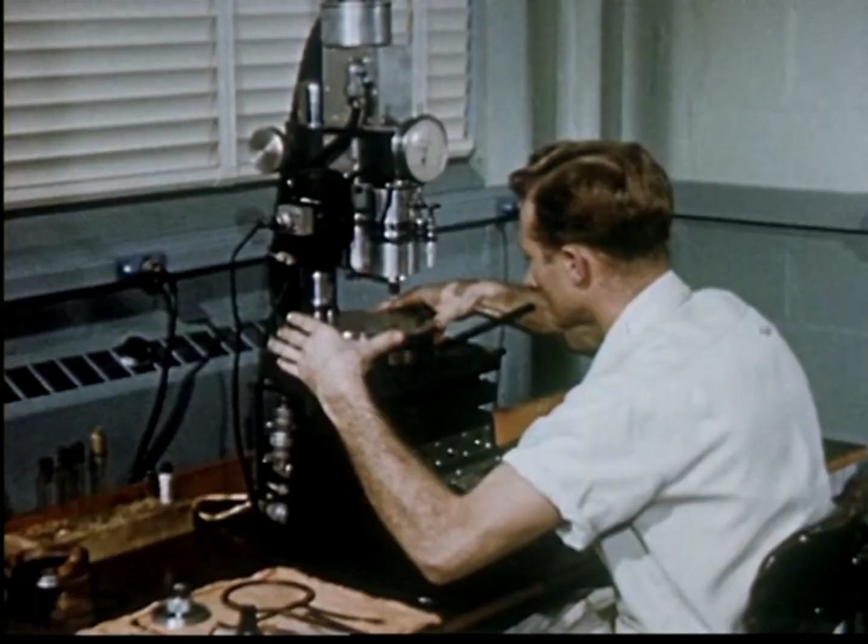And here's a micro drill that puts holes in hard metal so small that you have to use a microscope to get a good look at the hole it drills. Yes, a mechanical engineer has quite a bit of elbow room around here with all this equipment to serve him.

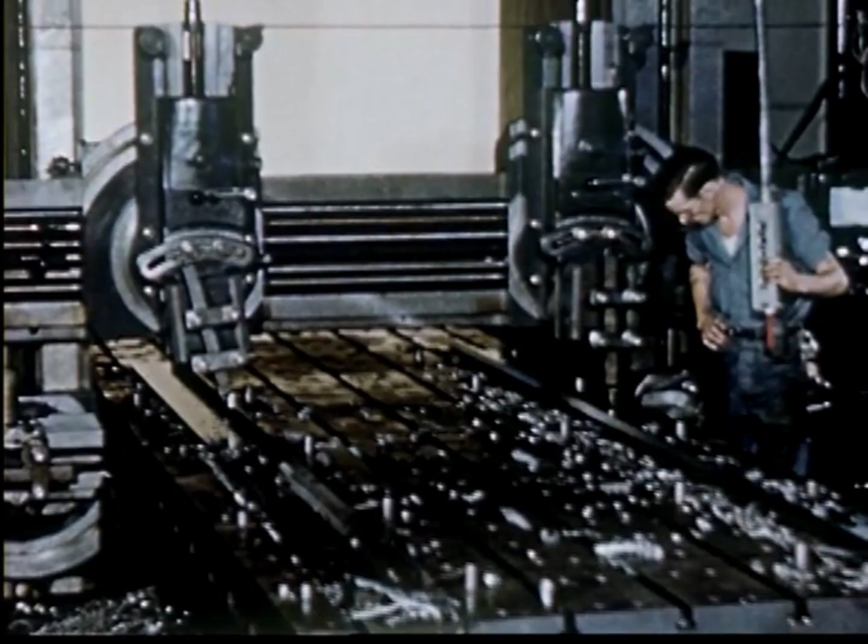Now that you have an idea of what does go on in a chemical company, you can see that instead of no opportunities, a mechanical engineer has many opportunities to use his abilities and training, and in many fields. Because DuPont's 10 manufacturing departments operate to a large extent as 10 separate companies, the way a man heads towards his goal varies from department to department.

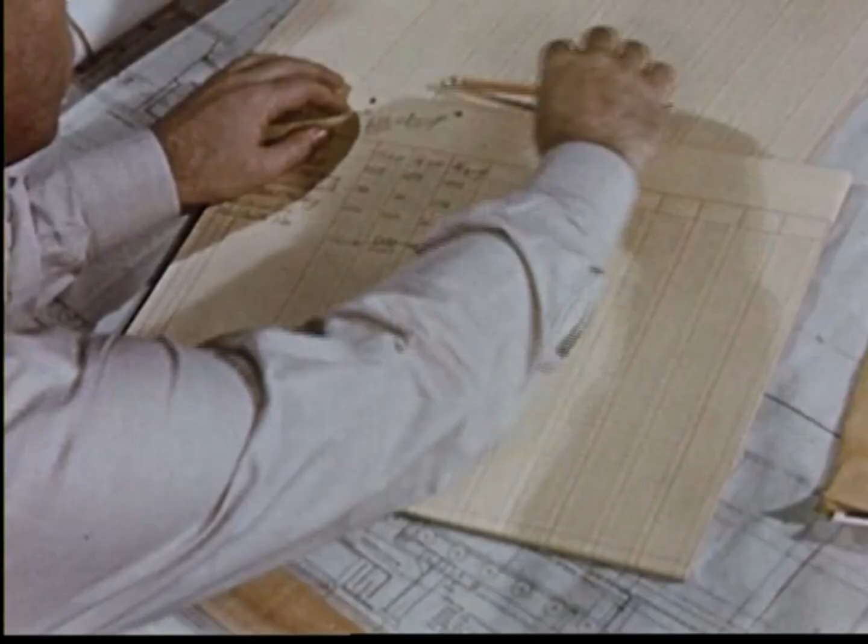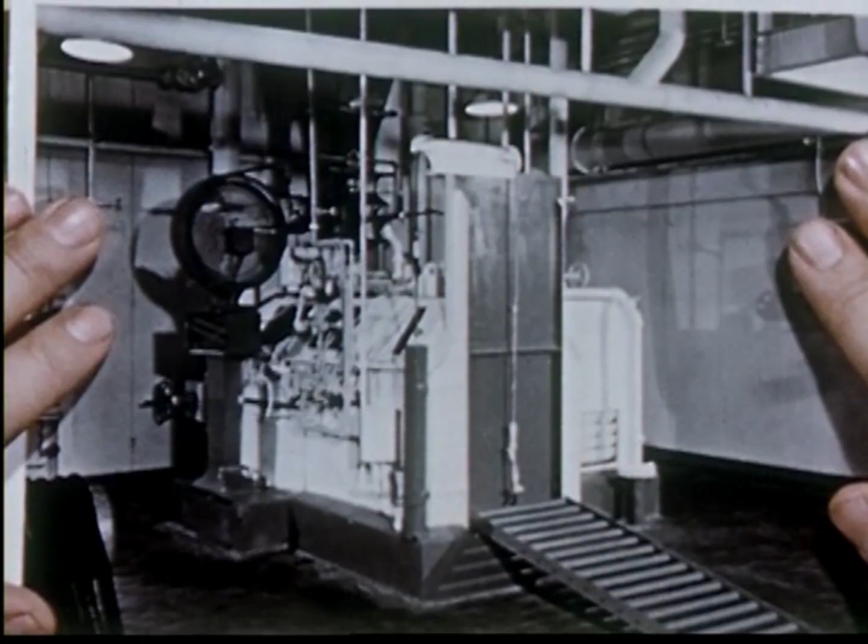You might start off working with a man who has had many years of practical experience. You collect material, assemble data, make calculations. In other words, learn the ropes. Gradually, you'd take on more and more responsibility until you've had enough experience to size up a problem, develop a method of attack, lay out a schedule, determine costs, and see the project through. In short, be on your own.

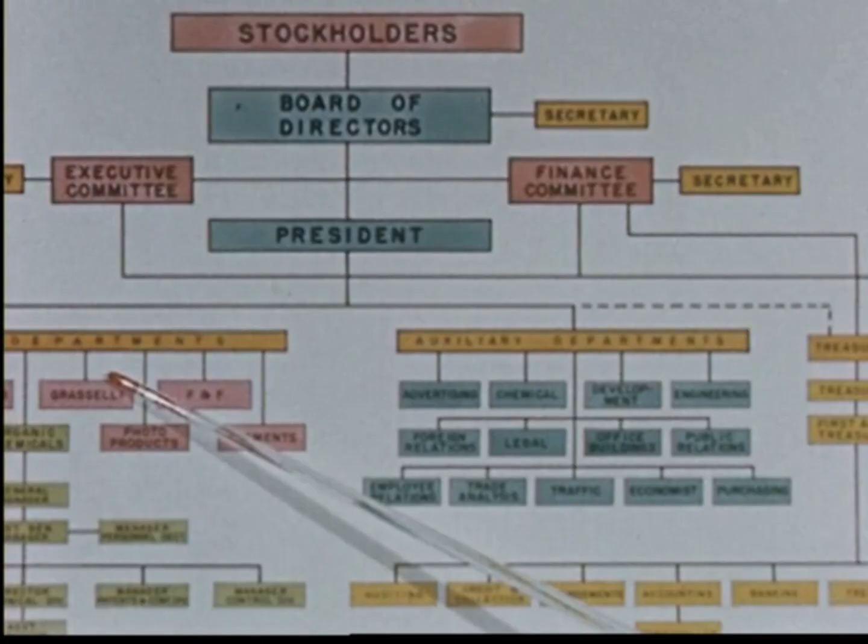In the manufacturing end, DuPont has several types of training programs. You may begin on an informal basis in a plant, as with some departments, or you may attend a formal training program that includes conferences on leadership, procedures, employee relations, company policy, and safety. In either case, you have every opportunity to get a broad picture of the company, as well as to learn your job. But regardless of which way you go, you'll find vast sources of information for your use.

Fine libraries with technical, trade, and patent literature. Over 100 engineering consultants within the company, each an expert with years of experience, metallurgy, stress analysis, power, lubrication, instrumentation, yes, even meteorology.

At DuPont, there is a never-ending need for better machines, better ways to do new things to meet the challenges of the future. Research and development, design and construction, production supervision, and all phases of plant engineering unite to meet these challenges. Mechanical engineers work with each other and with specialists of many other fields towards a single objective: better living for mankind through new ideas, new methods, new products, and improvements on existing ones.

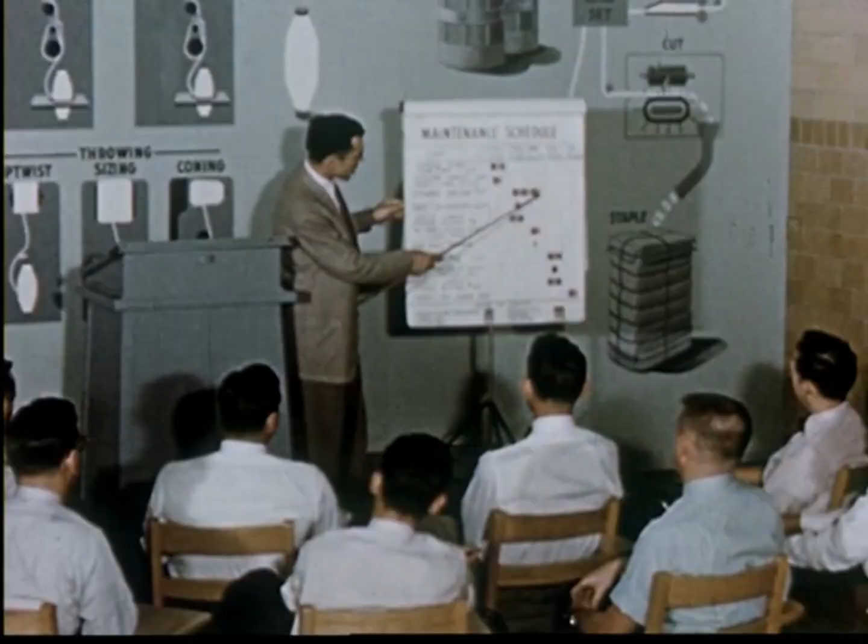There are many opportunities to contribute to this objective, and while doing so, there is the opportunity to express your creative talent and ability, to accept real responsibility, whatever your field of training. Yes, in such an environment, you can look to a bright future with confidence and optimism.